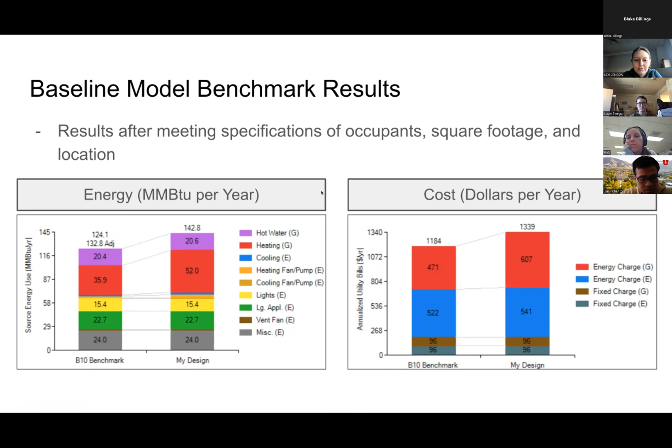And these are the energy MMBTU and the cost in dollars per year associated with that old benchmark model. Then here are also some monthly energy usage trends.

You can see the comparison of our model to the regular baseline. They're pretty similar. It gets very erratic in November and December, likely because of heating kicking on incrementally.

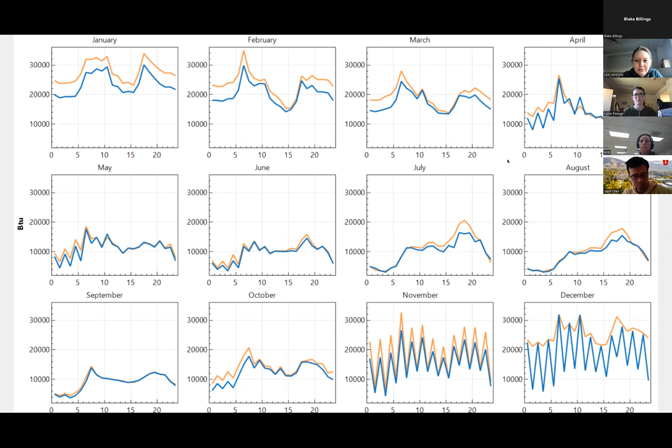Okay, these ones are mine, right, Cameron? Yeah.

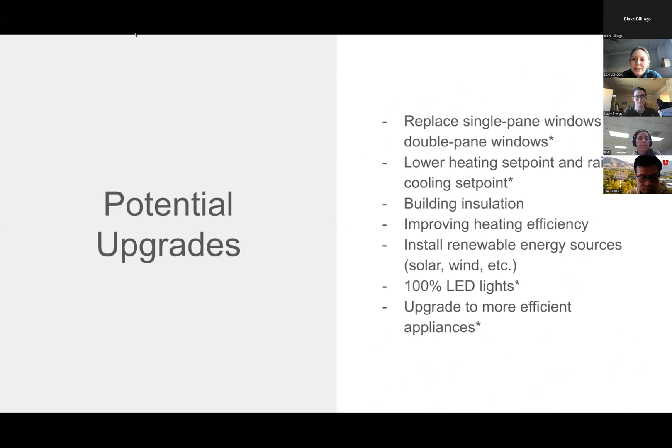Some of the upgrades we thought we would implement, we thought we'd just go all out and do as many as we could: replacing the single pane windows with double pane windows, lowering the heating set point and raising the cooling set point of the thermostat, and improving the R-value of the building insulation, improving the heating efficiency.

Installing some sort of renewable energy system, upgrading the fluorescent lights to LEDs, and then switching our appliances to Energy Star rated, more efficient appliances.

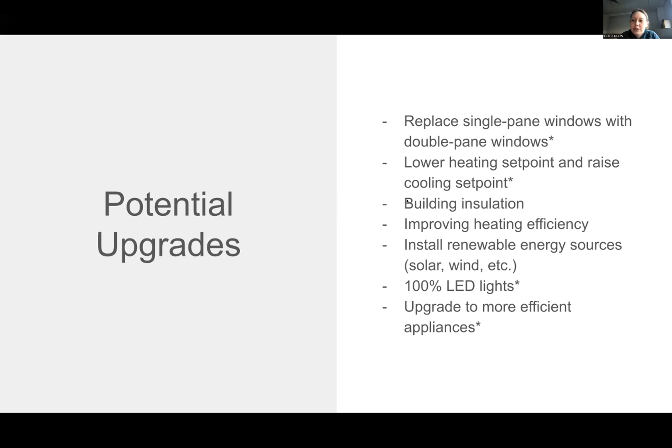So here is the new house with the upgrades versus the same baseline model shown before. We had a little bit of an improvement.

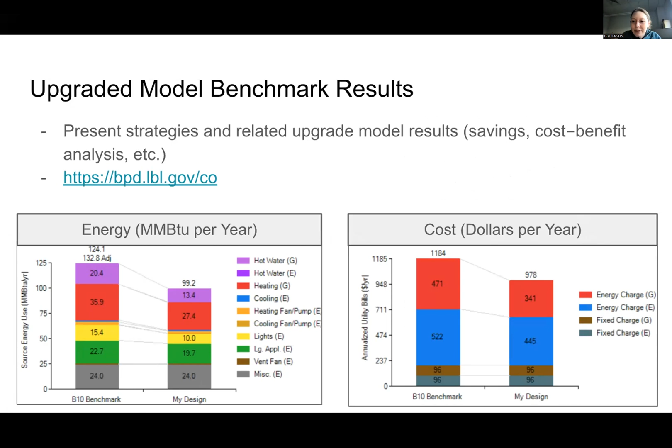And here's that same monthly trended data of the BTU usage of the baseline model versus the new improved energy house.

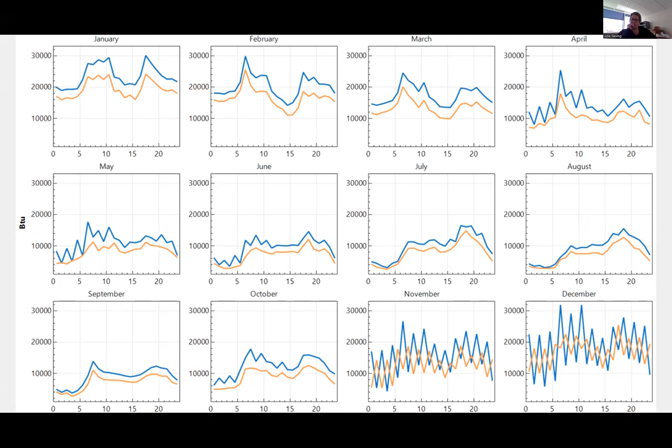Here is our cost benefit analysis. We very loosely costed out each of the separate things we did for the upgrades, and it totaled out to $6,400, which is significantly more than we were saving.

Overall, our upgrades were a little less cost effective than they would be worth, because the payback period was a little bit greater than the lifespan of the different things we were implementing. But that is the cost benefit analysis.

I'm wondering, for this cost benefit analysis, where does the cost come from? Is it just a rough estimate? The implementation cost, yeah, it is a very rough estimate of things that we Googled.

And for the lifespan, how do you get that? I guess that was also a rough Google search. We just Googled the average lifespan of a dishwasher and stuck it in the slideshow. So it's all very up for interpretation, just a very rough analysis.

My question for you is, are you using replacement costs or incremental costs for these? Because a lot of times, if you're looking at incremental benefits, you should use incremental costs—how much more expensive is an energy efficient dishwasher compared to a normal dishwasher, since you're going to have a dishwasher either way. We assumed the house had not great appliances and that we were upgrading to better ones, so it's the full cost of getting a brand new one, but incremental would be smarter.

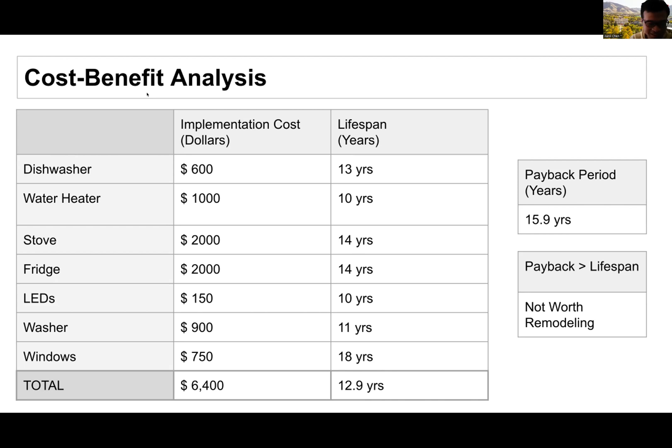I went out of order in the slides here, but we did do the building performance database analysis to follow up that cost benefit analysis. There was quite a learning curve working with this website. However, it is really interesting. I think we just had a misconception of what it was actually used for.

We spent a good amount of time trying to load in our own buildings with all the specified parameters, like 4 occupants, 1,600 square feet, and we're not getting any output graphs. But after talking to Dr. Chen, it seems like the BPD website is better used as just a baseline. They have tons of models, commercial, residential, office spaces, hospitals that you could compare your own building model to and look at those energy usage.

Sorry, go ahead. Like, how's your simulation results compared to what you have seen in the database?

So our measured results, it seems like our building used higher amounts of energy. That was something that I played around with when I tried to load my own building into the BPD software. We found that our house was actually not super efficient, and you could see that based on the cost of implementations.

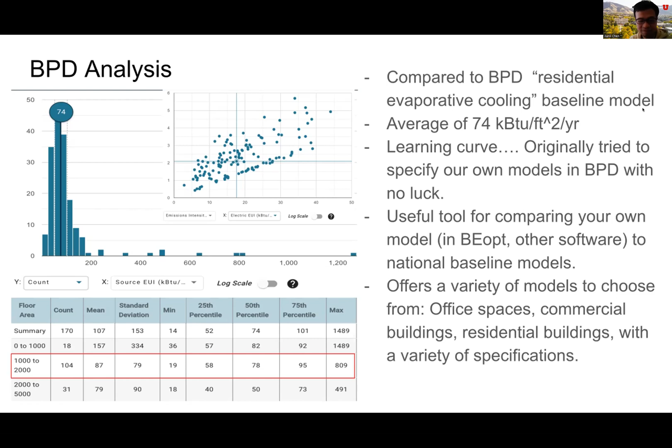I just had a couple of questions for anybody that wants to answer them, including Dr. Chen. Andrew brought up, how would changing the direction that the house faces, whether it be east or west, affect energy consumption? And how could you justify a project like this that has a payback period longer than its lifespan? Yeah, I don't know, does anybody have any thoughts on this?

So Cameron, I'll just jump in on the first one. That first question is a great question, and when you're doing what I would consider basic building design, especially around energy efficiency and renewable energy goals, the orientation of your building is definitely one of the core considerations of how to maximize your energy efficiency. And generally speaking, the short answer is it does affect it. It does affect both heating and cooling.

Sort of a rule of thumb is to orient buildings when you can. Oftentimes, you're inheriting a lot or a place where you're building that you can't do a lot with the orientation, but there are optimal ways to basically orient buildings to be able to minimize energy use as well as maximize renewable energy production. So that's a great question.

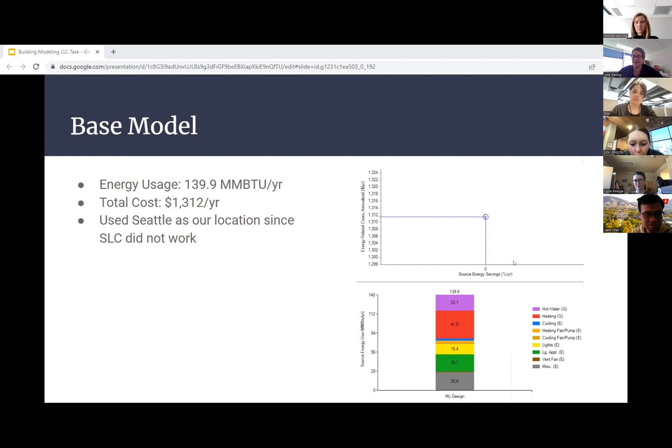So we're gonna do a quick vetting here. Show of hands, you guys can use the reactions on Zoom: how many folks here actually pay their utility bill for where they live right now during the academic year? Actually use the reactions so I can see a little better. Ellie, if you can see everybody, I'm curious if you could get a quick count. I can only see partial. I think it's 6. I only pay electricity, no gas. Yeah, so I'll make it even more general: raise your hand if you pay any of your utility bills during the year.

So we have a lot of hands up, right, Ellie? Yeah, 6 or 7 hands. Okay, campus housing does not count, true. Basically what Alex is proposing here is this residential model that they're using. Their total utility bill per month is $110. That's assumedly gas and electricity.

So I'm just curious, clear off your raised hands. If you pay your bill, is your bill $110 a month? How many of you pay $110 a month or more? I see Mateo has his hand up. Cameron, you pay more than 110.

Okay. Sorry, I live with 5 girls, so I had my hand up, but I forgot to put it down. Of course, this building is a pretty good sized building, so I don't know how it compares to your house, but are there more people than Cameron that have their hands raised? Dr. Chen? I pay more than that. Lexi says she would cry if her bills were that high.

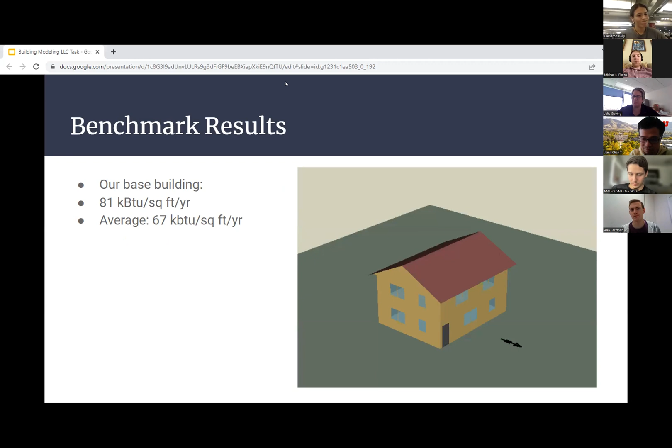Yeah. So, obviously, it's pretty close, within striking distance, we would say. Cameron, do you remember off the top of your head what your total dollars came out to for your model? I don't. I could check right now though. Okay, post it in the chat. Thanks, Alex. Just wanted to do that little reality check with everybody.

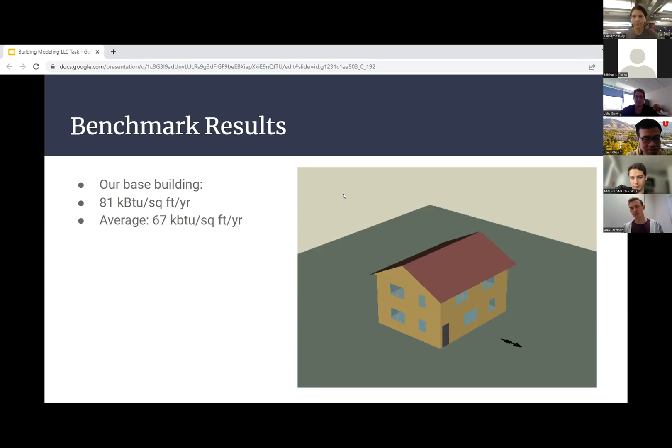Yeah. So our base building gives it in kilo BTUs. It's like 81 per square foot per year. But based off of messing around with the BPD, it turns out the average is about 67. So obviously there's some improvements that we could do for this house based off of the things we were given. So the first thing we did was temperature set points. While people are gone, we increase them or decrease them depending on cooling or heating.

And you can see our two graphs right here. We've got our building, which is the 139.9, and then it would be 136.7. So we're saving about 3.2 million BTUs per year, and that's like $36 that you're saving. The graph is showing you source energy savings in percent per year, so you're saving just over 2% per year. It's not going to cost you anything, but you're saving about $36. So that's a pretty good thing that we can do.

As well as the other one, similar to the other group, we decided to switch to LED lights rather than what they were right now. And so there's about 5.3 million BTUs per year, and that's like $35 you're saving. As to the cost, in the software, the baseline model shows you the cost of implementation for different things. It said the cost was about 112 to implement all the things with lights. So the payback is about 3 years. We said it would be lower with incentives, but that's also not a bad payback period.

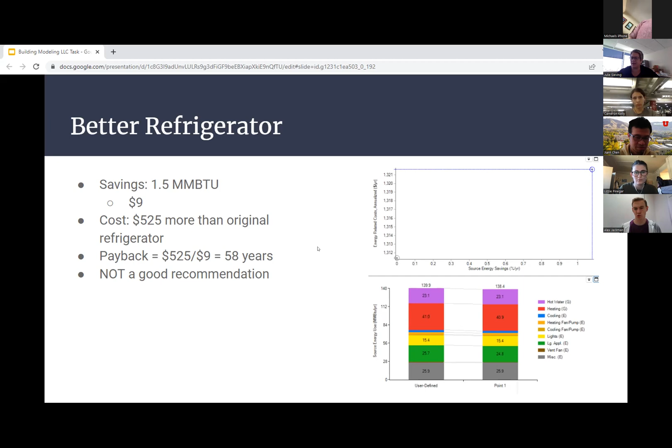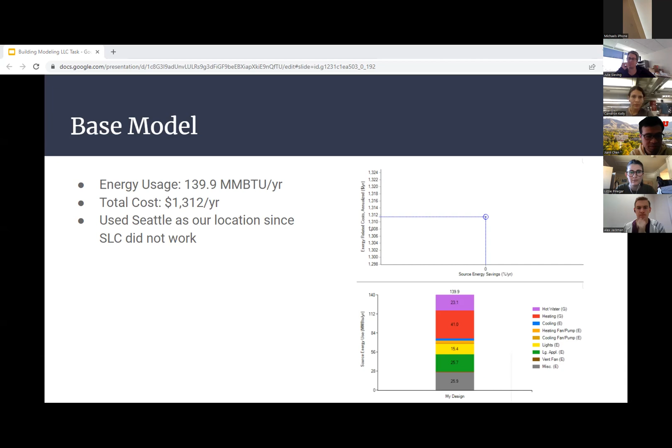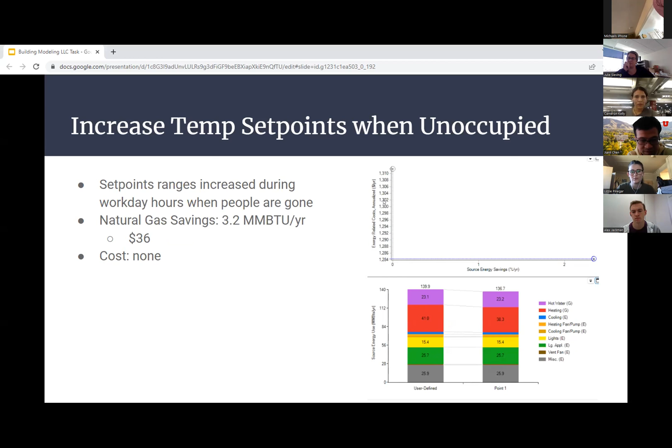Dr. Chen, did anything jump out at you? Yeah, I'm not completely sure what the specific and detailed settings are for these two models. Possibly the systems that you chose are different across the models. Not completely sure. Can you guys show your upgraded model slide one more time? Yes. So our utilities per year was $978 for our upgraded model, coming from about 1,300. So it seems like we have pretty similar savings. We made pretty similar adjustments to the upgraded model. So most likely something in how you define the base models. Interesting.

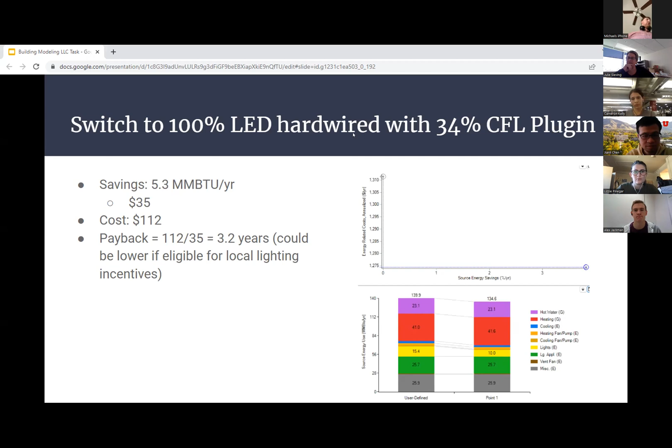Okay, good. Alex, I didn't want to cut off your presentation there. Did we get to the very end of it? Just if there were any questions. So.

Awesome. Well, I have one group question then for anybody on the phone, whether you just learned the building modeling in the last week, or if you've done a little bit more simulation. I'm curious if anybody would comment on the experience that you've had and an application or a situation for the IAC where a simulation model might be helpful. One caveat is that generally speaking, simulations are probably more involved than we would ever get into on a regular basis. But I'm curious if people could throw out some ideas about where we might be able to apply some of this to our AR development. Any thoughts?

Sorry, I think that, for example, if you were to try to model a facility, you would need to have a lot of information from the facility that we sometimes don't get. Agreed. 100%, Mateo, to your point. So I'm curious if you saw any specific applications that you could use it for though.